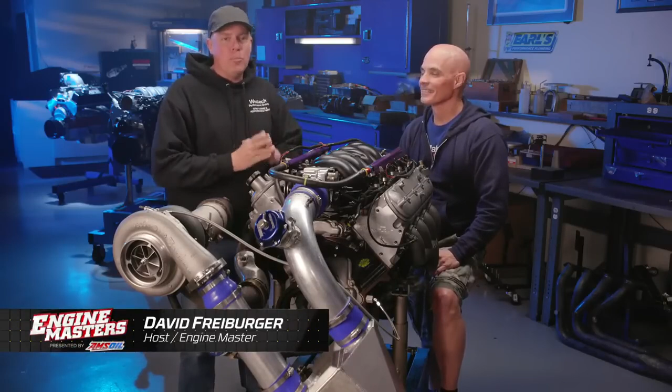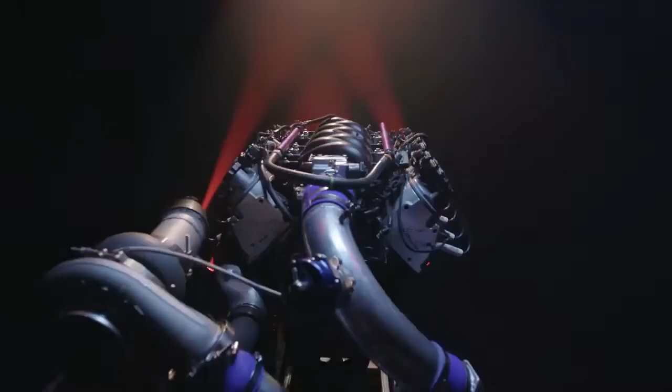He's going to run the dyno over the next few episodes, and he basically put together this whole package of hardware here that's going to make a whole bunch of power and show us what this episode is all about, which is intercooling. Are we going to do an air-to-water intercooler, or would you prefer to have water meth injection? That's what we're gonna find out. That's gonna be a good comparison. So this is my motor, but you know more about it than I do. Tell me what we did here.

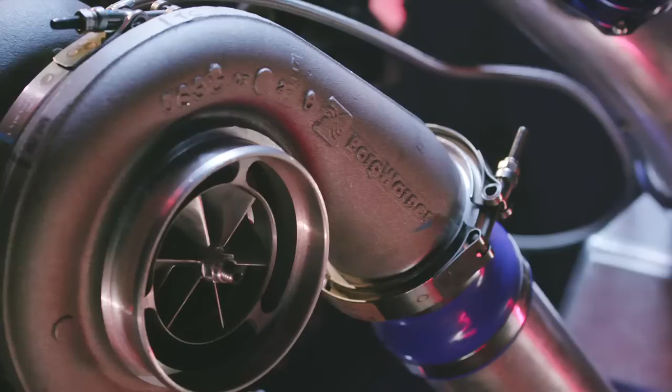All right, we got a typical 5.3 LM7, you know, an iron block truck motor, basically. This thing has forged internals. We have Trick Flow 205 heads. We've got a Brian Tooley stage 2 cam. I think it's a 2. You think it's a 3. Yeah, either way. Take your pick. We have got a BorgWarner S480 billet wheel turbo supplying all the boost that we need, and we got this Holley-like turbo system with the cast manifolds. So the combination's capable of supplying way more power than we need for the test, but it will work perfectly for what we're doing.

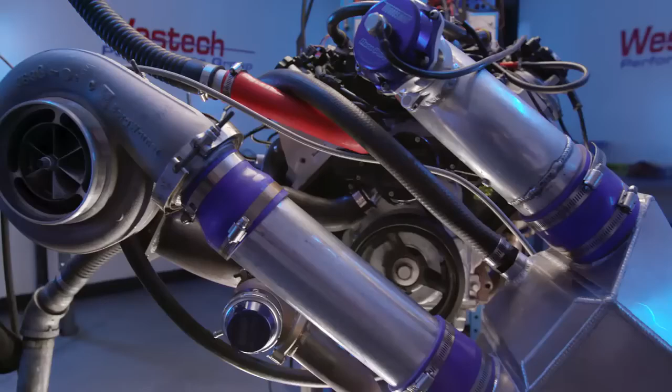And what we're doing is trying to aim this at a guy who's probably doing his first turbo LS package. He's putting it in a car. He knows he's got to have charge cooling. Yeah. Because when you compress air to make boost, to make power, you make heat. That's right. And heat makes stuff blow up real bad. And so you really want charge cooling. And the option is going to be either an intercooler or water meth injection. That's right. For a guy at this level, which is 700, 800, something like that, do you want to go through all the plumbing of an intercooler, or can you live with just having the water meth injection? That's what this is going to be all about. There's pros and cons of both. You got to look at it all, right?

We're going to roll this on the dyno, hook it up, fire it up, and then hope that Richard doesn't blow it up over the course of the episode. I'm not making any promises. That'll be your fault either way.

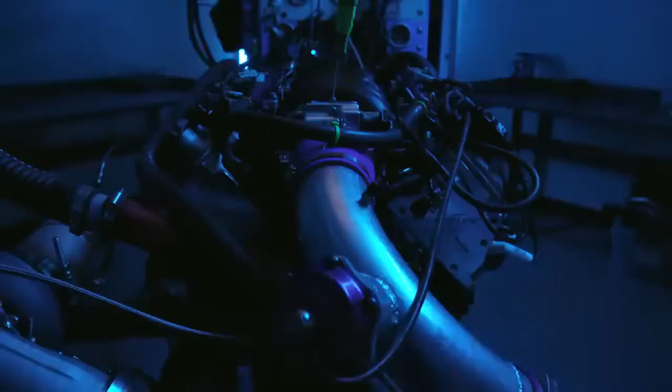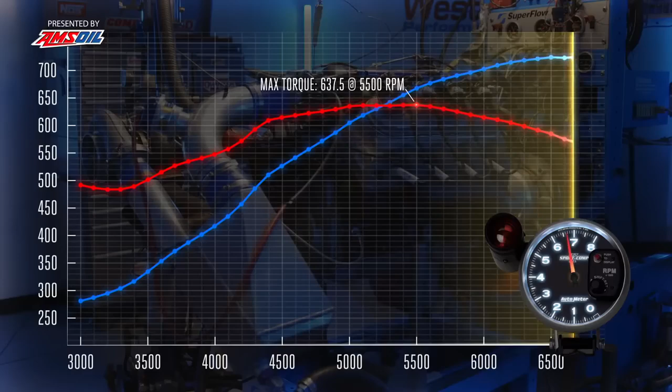Okay, we've got our 5.3 turbo motor up on the dyno. We're going to test the intercooler versus water meth, but one of the important data points we need to get is right here. We're going to take a charge temperature measurement in the intake manifold after the turbo and after the intercooler, and also after the water methanol injection, after we install it. So we're 100% set, right? I think we're ready to go. Ready for turbo action? That's right. Motor's up on the dyno, got the intercooler on. We just got to start it up and run it, I guess, right?

Pretty much. See, this is another deal. We always have this with Brule, where he pre-tests everything, and you've pre-tested this, so you know the answers, and we have no idea. So I'm not going to tell you a damn thing. You're going to look like a genius. Yeah. Wait, I can just tell you, right? Nice. Yeah, exactly. No, fire it up.

Let's put some heat in the manifolds and let's get going. See what it's going to do.

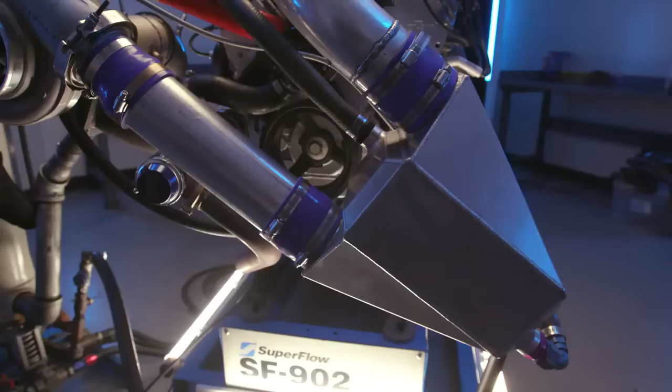Can you believe that's just a standard cruising model? Everybody has one LS power these days? Yeah, that was super easy. Yeah, it's embarrassing, isn't it?

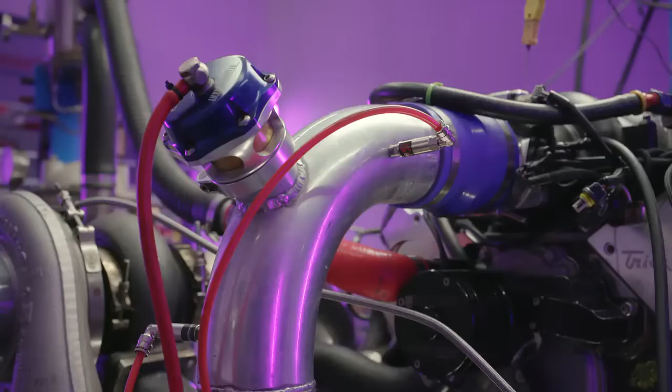At least from here. So we made 729 horsepower at 6,800 RPM and 637.5 pound-feet at 5,500. And the boost curve, call that 14 pounds of boost at 6,800 RPM. Yep. So how about our manifold air temp? The temperature in the plenum, we're measuring it right after the throttle body, starting about 70 degrees and finishing it up at a peak of 86 degrees.

So that's really all we got. Now the next thing we have to do is just tear the intercooler off and do it with meth and see what the same answers are. Yep. Meth? You're really going to hit it with some meth?

Yeah. Well, and if this was a lab, then it would be a meth lab, right? Well, it's sort of a laboratory. Yeah. How come this is too easy? This is all we need to know? Yeah. Do you want me to make it harder to try to go out and break something? Yes. Disconnect one of the rockers or add some drama. I mean, it would be all Roadkill if we did that then, right? All right, let's go rip it apart. All right. Make it better.

Okay, now it's as simple as removing the intercooler and installing, I guess, just a straight tube and water meth injection, right? Yeah, we're gonna use this same tube. As a matter of fact, we already got our holes drilled for both water meth. We gotta clock this, so Dulcich is gonna get on that, spin that baby around.

It's all good. You want me to take the dyno water off and pour it all over the floor? No, we're gonna try not to do that. Okay. Because even though Brulee's not here, he would still be yelling at me. He would know. Oh, yeah.

Yeah. A lot of guys these days, they don't want to run the intercooler in pro drags and stuff. They're just running methanol. They're throwing the intercooler away entirely. Sometimes this is a packaging problem, whether it's an air-to-air or air-to-water. Guys just can't fit it in there, especially in a late model deal. So they can run water meth. It fits in there easy. It's easy to install. It's adjustable. Kind of cool.

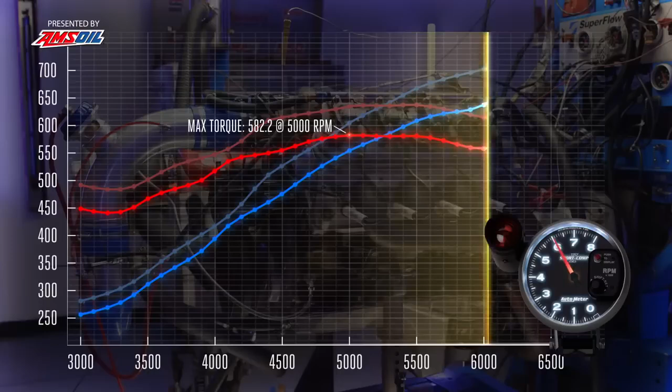Our intercooler is gone. Now we're gonna find out if we can replace it with water meth injection, which takes a liquid like this, the Snow Performance Boost Juice, and sprays it into the discharge tract to pull heat out of the air from the latent heat of vaporization of this mixture. So the way this works is, first of all, we have a pump like this one right here that you're gonna have to mount in your car somewhere. And it is pumping fluid out of a little tank like this.

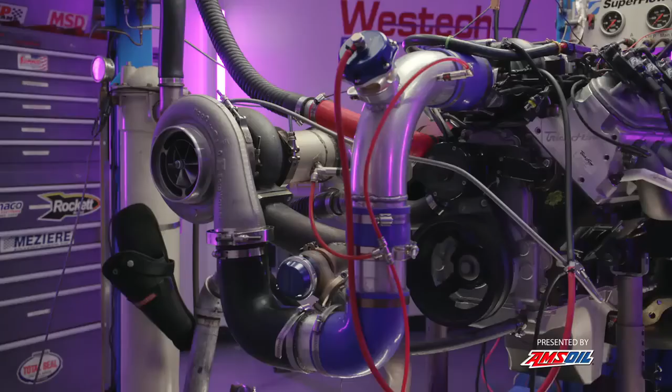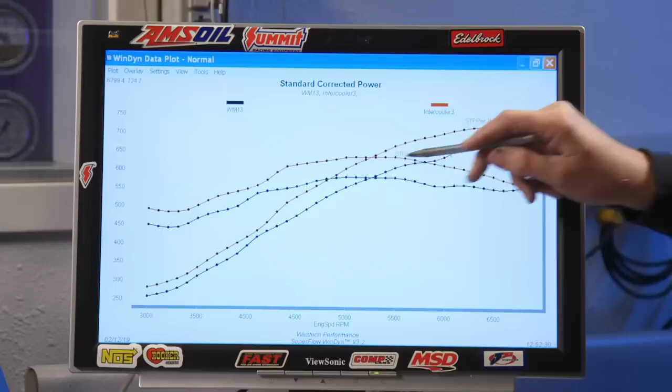You've also got a controller, which is on this gauge right here. And what it does is it tells the system at what point of boost you want to start pumping and at what point you want to have 100% of that pump going. So in this case, we've got it just starting to flow a little bit of fluid at 5 PSI, and it's all in at 13 PSI. Now, what it's doing is it's taking that water and methanol mixture, and it is feeding it through this red line into a couple of injectors in our discharge tube just before the intake manifold.

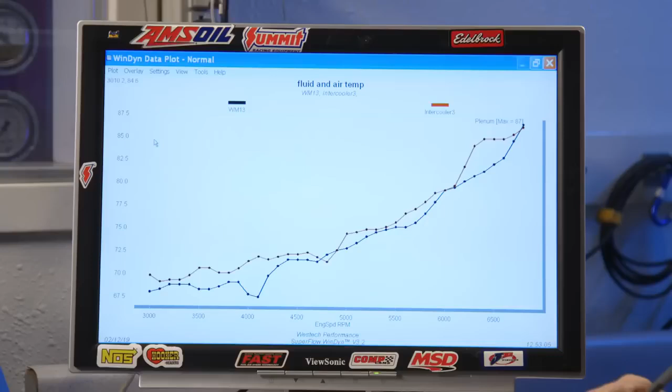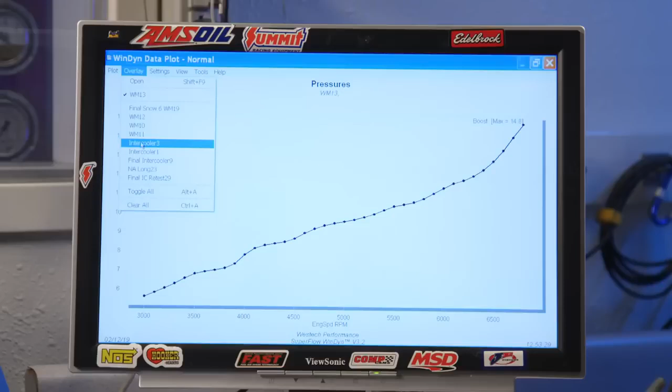Now, there's a lot of math to figure out what size these injectors should be. You can see that in the Snow Performance instructions. In this case, we've got a 1 and a 6 adding up to what we hope is going to be the right mixture here. Richard's actually pre-tuned all this, so we know that he's got it right. But that is something you need to deal with, is the injector size and that ramp rate on how the pump works. The question is, for all this complexity, is it actually simpler than an intercooler and a water tank and all that other stuff? And is it going to make as much power? Well, that's what we're about to go find out.

You've got this thing pre-tuned. So what's your tune-up experience when you add meth injection? Do you need to take fuel out of your tables? Yeah, because the water meth system obviously is going to add fuel. So we're going to see that on the air fuel mixture. So it's definitely going to change that. So basically we've made the base tune leaner, and the water meth is now going to supplement that and add more fuel.

So it's supplementing it by like a ratio, half a ratio? Yeah, by like a ratio or a ratio and a half. It's quite a bit. So if you don't have that system on and I try to make a run, we will definitely notice it's going to be too lean. Yeah, it'll be too lean. And conversely, if some guy slaps this on his car without changing his tune-up, it's going to be way too rich. Right. Yeah, which is obviously a little safer to be that way, right? I mean, you want it to be safe. It's better to start safe and then dial back than the other way around.

You don't have to worry about that with an intercooler. It's always going to be working for you. It's always there. You ready to fire it up and find out what this does to power? Let's see what it does. Okay. I want to know. Inquiring minds and Dulcich. Thanks, Richie.

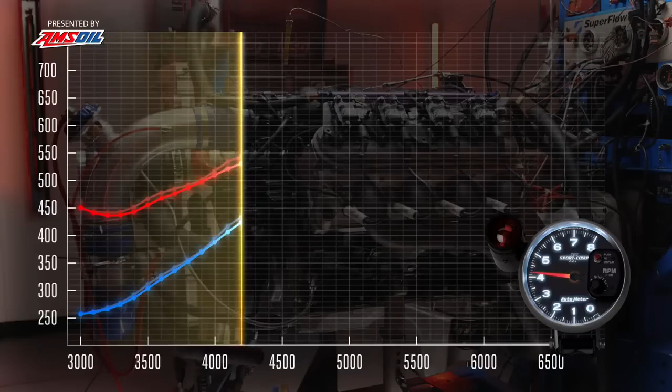So the question is, why? Is it boost? Is it temperature? Should we look at temperature? Let's look at temperature. Okay. So now we're gonna look at the data from inside the intake manifold to see what the temperature was with the intercooler versus the meth injection. And pretty close. Just about the same. There's almost no difference there. The red line is the intercooler, which actually is just a little bit hotter at a couple points than the meth injection. It's water meth doing its job there. So that doesn't explain why the power is so radically different.

So boost. In that area where there's a big difference, they're the same, yeah. The meth injection shows higher boost up here at the peak, and that's because we knew that was going to happen basically. When you take the intercooler out of the equation, you're removing a boost restriction, and so boost is going to go up, especially at high airflow demand. That's right. But that is not explaining a difference of, what did you say, like 60 pound-feet in the middle? Yeah, it's a ton.

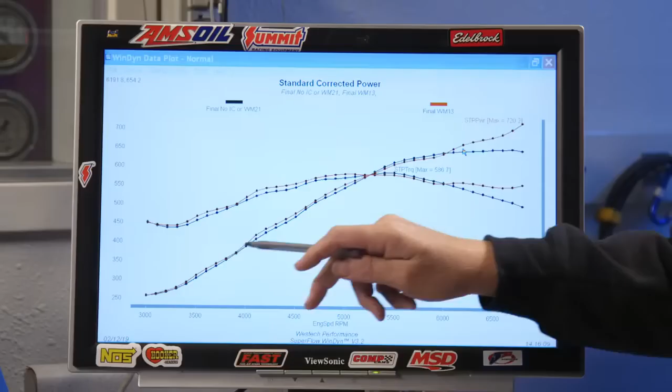So how come meth doesn't make power? If the air fuel is the same and the temperature is the same and the timing is the same, what's going on? That manifold was never designed to flow a single droplet. No. It is meant for dry air. And it's flowing a lot of droplets right now. Exactly, you're flooding that thing, and who knows if it's all hitting the front two cylinders or what. All you really know is that you've got your temperature drop right there behind the throttle body. You don't know what's going on cylinder to cylinder. Have you ever done it on like a single plane or a tunnel ram? Not that I can remember. I don't think so, but I think it probably would be a better idea.

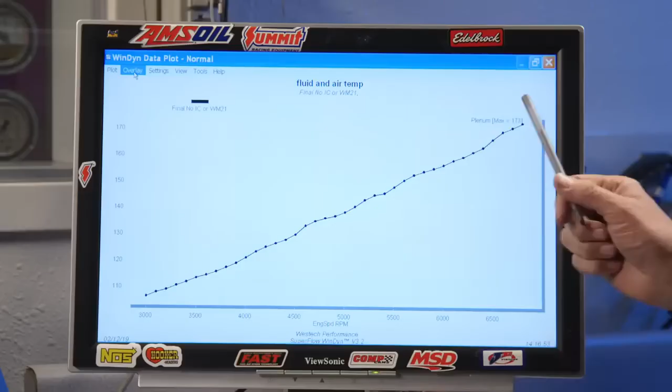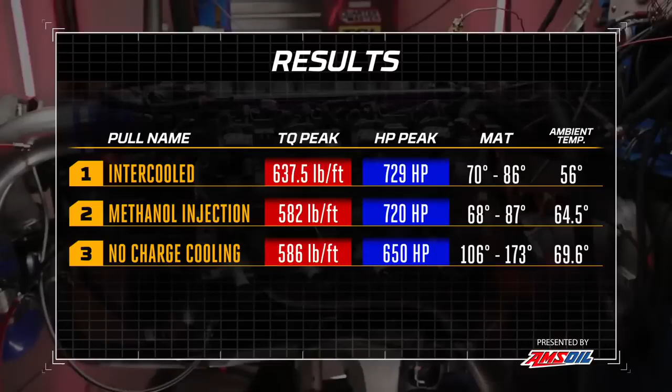Okay, intercooler 1, meth injection not. Well, so yeah, good. But I think this is another one of those cases where testing has shown us that we don't know what we don't know. It raises more questions than it's answered. The short version is, if you're a typical guy with an LS intake manifold, you're better off with an intercooler than you are with a meth injection. Yeah. For area under the curve, that's actually an enormous difference.

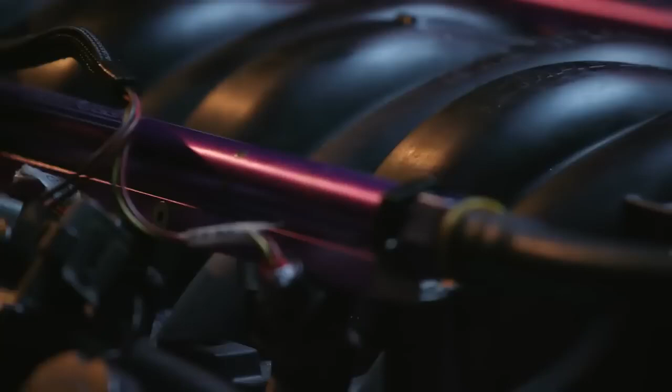I think what we need to do now is run this without an intercooler and without water meth and find out how much both of them are doing better than not having anything at all. Oh yeah, that might show us something. You want to show people the disaster? I think that if we show them what a lot of guys are out there doing wrong, then we can go, here, you can get this much better or you can get this much better. Okay, let's do it. Yeah.

So we're now going to pull it with no charge cooling whatsoever, and hopefully I've got a motor left when we're done. We do have Rockett Brand good gas in this thing, so even if we detonate... If he has most of the motor, that's still fine, right? A little bit of the motor. Yeah, better than none.

Right, now we're entering the danger zone, stuff you should never do with parts that you know and love from your own pocketbook. We're going to run with no charge cooling whatsoever. Running without a safety net, is that what you're saying? Yeah, exactly. Have you done this before and blown stuff up? Only on your motor.

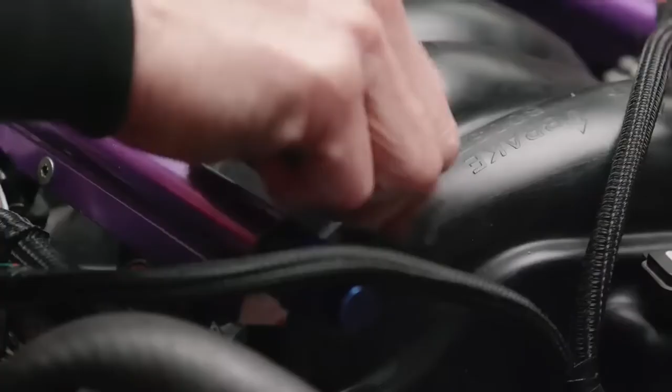Way hotter in the plenum. It sure is. You see that? Yep. 650 horsepower, way down, and 586 pound-feet of torque, which is up a couple pounds. Well, we're actually slightly better than with the meth injection. Uh-oh. That doesn't make sense. Oh, look at that. That's weird.

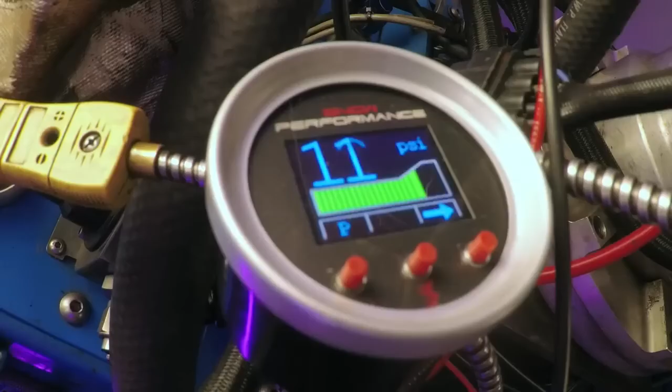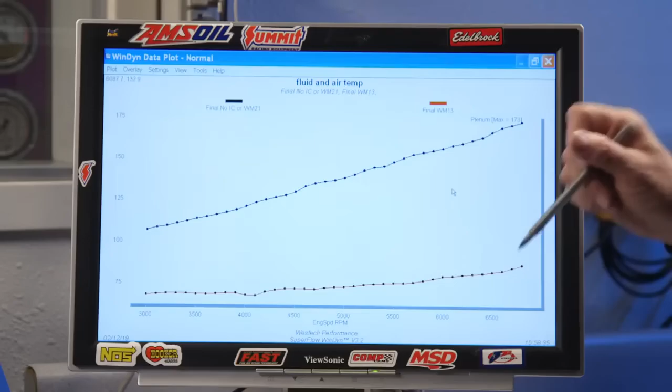Okay, ooh, see, that's 173. 173 degrees with no meth injection. And then with water meth injection, look at that. Wow, it's only 86 degrees. So how do you have an 80 or 90 degree change in charge temperature and not have a big change in power? Because it's better everywhere. That intake manifold doesn't work with meth injection. So you think it's a distribution problem?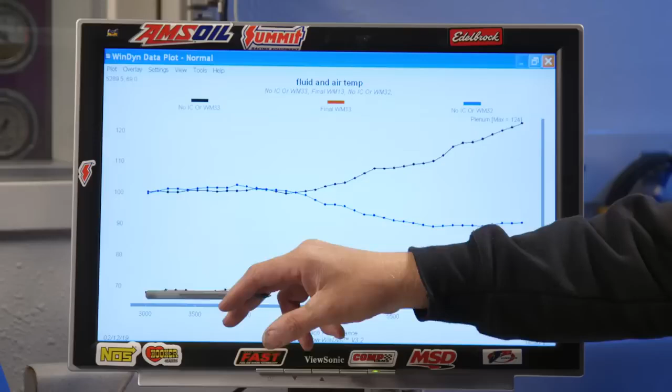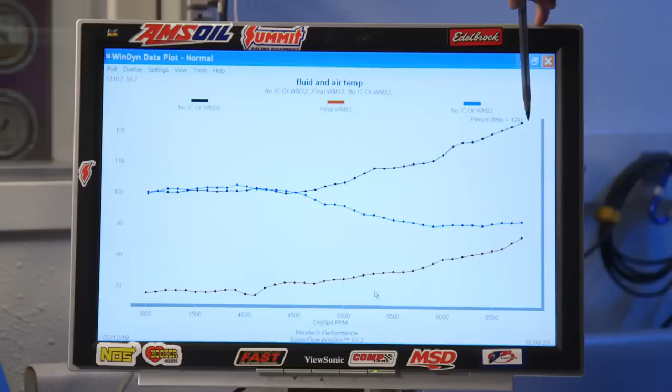I think that if you look at what that manifold is doing in there with the plenum and all of those big log runners going around and everything, there's no way that water is getting from here to there. We are introducing a percentage of our fuel via the wet manifold flow path. Right. And that is affecting the tune, and that would tend to indicate that the manifold is distributing that methanol to the cylinders because it's showing in the lambda. Not necessarily. The lambda is picking up 4 tubes, so what's the difference between the average of 4 tubes versus one of them being radically rich and 3 of them being radically lean?

I mean, it's all conjecture right now, right? Because we don't have a definitive answer. We need some means of measuring the air temperature, maybe in a different location of the manifold. Yeah, what if we got it closer to the port? I think what we've come up with is we want to move the sensor someplace else to see if we can read an individual cylinder and gather a little bit more information. That'll give us more information. Is that fair?

Yeah. Okay, so we're going to go confuse ourselves even further by putting the sensor in a different hole. All I know is that we get to drill and tap a hole and put something somewhere else, so that's all good. Yes, let's run some plastic through my engine. All right, let's run some stuff. We're down for that.

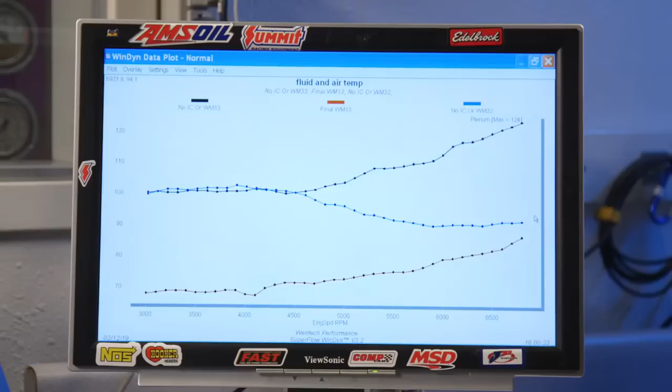But what was baffling us is that the power didn't change that much at all. Where's all the stuff that's supposed to be in the middle here? So we're sitting around going, this makes no sense. How can it make the same power with that much difference in air inlet temperature? We ended up putting the temperature sensor all the way back in, I think, number 7 cylinder, and then we also got one in the number 1 cylinder.

And we found out essentially the problem here is that when you shoot water and meth through this intake manifold, the distribution is a disaster. Look at this. This is the water meth pull in the original location with the temperature sensor. Then we moved it and put this in number 7, all the way back, and this one in number 1. And so what you can see here is that there's a divergence right around 4,500 RPM where all of a sudden there's a gap of 30 degrees between two cylinders.

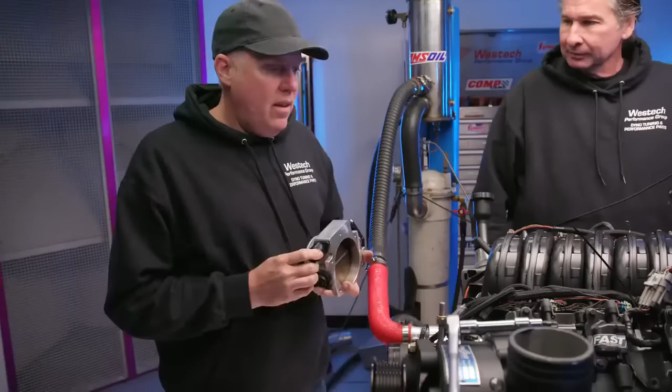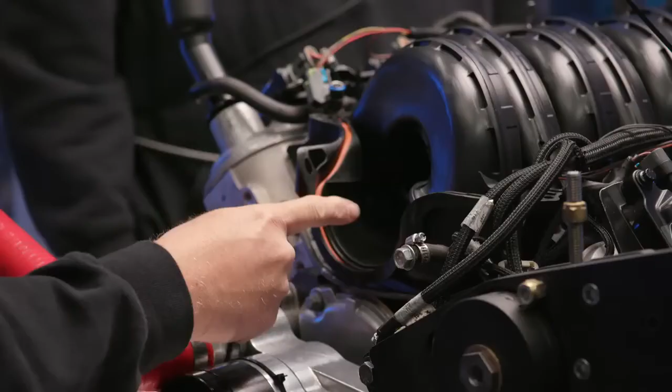And what that's telling us, and what Steve saw when you looked in the manifold, is that the distribution is a mess. That meth is not providing equal cooling to every hole, which also means that it's not providing equal fueling to every hole. That's a problem. Exactly. All of the liquid just gets splashed at the back of the manifold because that manifold is designed for dry flow. And now we're using it as a wet flow piece, and all of that heavy liquid just goes to the back. Those cylinders get nice and heavily fueled, maybe too much fuel. Right. And they get more cooling, but up front, hot, nada, dry, and lean. Yeah. So it's just a disaster.

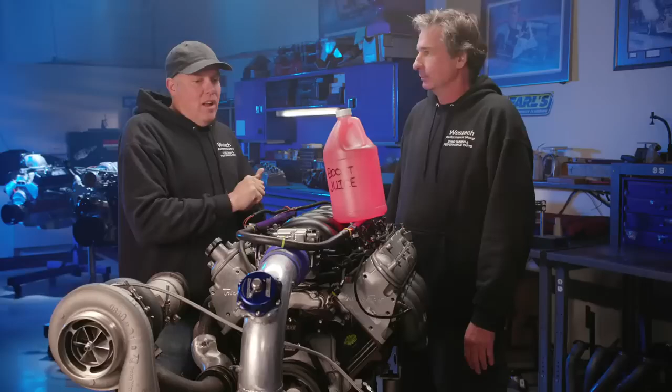Yeah. Is it trash? Garbage. Garbage. Imagine if you had that conversation with a GM engineer that designed that manifold. Hey, we want to run fuel through this thing. What? Why would you ever do that? It's not for that. No, it's not for that. Does not do droplets well.

If you look at this thing, the interesting thing is it starts out a lot hotter. They both start out the same, and then as this one starts getting happy and my charge temperature starts coming down, this one says, no, you're taking all that stuff from me and I'm getting really hot and I'm unhappy up here. Right. The average is right down the middle. Yeah. This one's taking what this one is losing. And even if that average was right down the middle, that would still be worse than the numbers that we're seeing right in the plenum, which is what we want it to be.

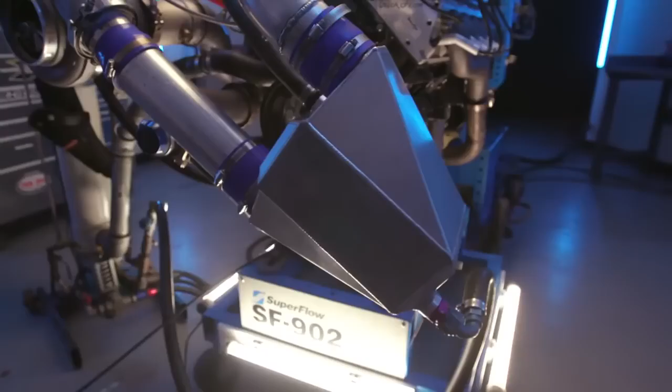So, okay, my conclusion from that is water meth injection works to reduce charge temperature. Yes. You got to use it on the right intake manifold. Right. And you're going to have a disaster on your hands if you are a guy who does what everybody does. How many times have you seen this on the street with that intake manifold? Exactly. Just plop an injector in a hole and call the thing good. You're going to cause yourself more trouble than you're actually gaining. Although that's not to say there's no value in water meth injection. It obviously cools the charge temperature if handled properly, right?

Right. So do you think, like we were talking about, that the only way to do it on a manifold like this is to have a direct port water injection system so that all the cylinders will get an even amount? I say that's an excess amount of complexity. I'll go with the intercooler every time, I think, with that kind of setup. We don't want to have 27 nozzles going back and forth different ways?

That does lead to, I think, the final conversation of all of the pros and cons of intercooling versus water meth. Let's just give water meth a mulligan on this one and say this intake manifold sucks for what we're doing. Water meth could work better than what we established it for. Yeah. But you and I can go talk about some of the pros and cons of making power with the intercooler versus water meth. Oh yeah, and I've got ideas. Okay. That's good. You can change the engine to the next test. Nice, yay!

That's why we hired him.

All right. This is a completely different engine, but this is kind of an explanation about why we're having the trouble with that meth water injection making it into every cylinder of the engine. So imagine you got your throttle body right here as we do on that other intake manifold, but now we've got a 2-piece FAST intake that we're able to take the lid off of.

And you can see air goes in here and the water and meth pretty much is shooting all the way to the back. See, the cylinders pick up the runners like right over here. This is very similar to what's inside that other LS6 Dorman intake that we're using on that other engine. Just thought I'd give you a quick visual on a different engine as to why this thing is a disaster.